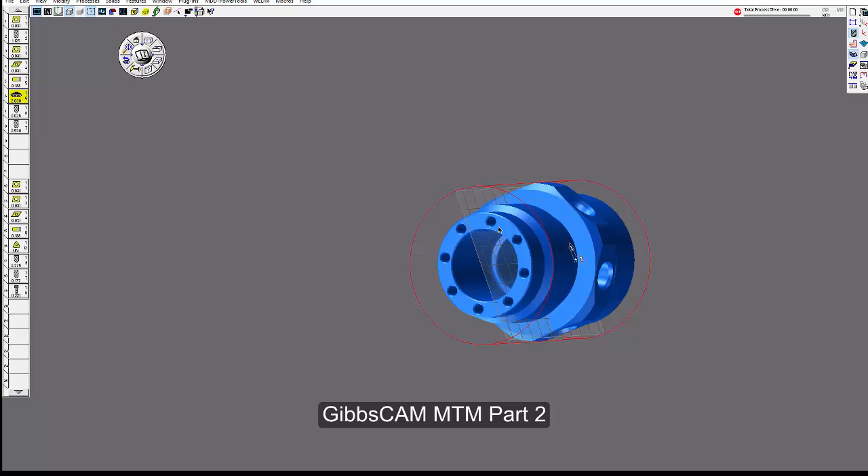This time we're going to give you a quick little review on how to do a complex MTM part using GibbsCAM. You can see I have my model already brought in. Has some ID work, end work, tapped holes, OD holes, some threading. I already brought my model in and oriented it correctly.

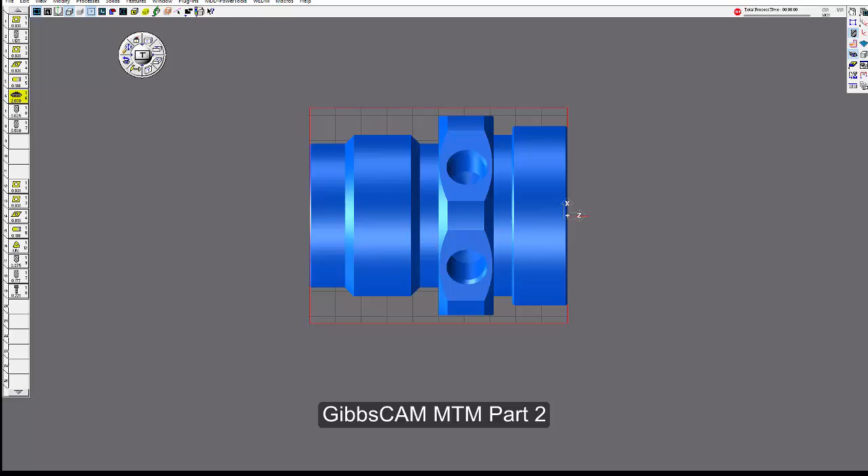Usually after you orient your part and get your origin where you'd like it, normally you go to view and do shrink wrap visible. This will wrap material around your outer boundaries. Now here you can open up your document page and you can change these values as you need to. This did a shrink wrap, did a 3-inch on the Z.

I'm going to add 1/8 of an inch, so there's some material coming out. I'm going to have it sticking out of the jaws 3 3/8, so my jaws are going to be over here, and my material is 3.5 inches long. It's actually going to be 3.625 because I'm going to add 1/8 of an inch on the back end as well. Over here, my clearance values.

Now remember, on MTM, the MTM product is for your specific machine. So when you get a MTM post processor from Gibbs, it'll have your specific machine here. Same with some of these others here, and all the details about your machine. It knows how many turret stations there are, clearances between spindles, etc.

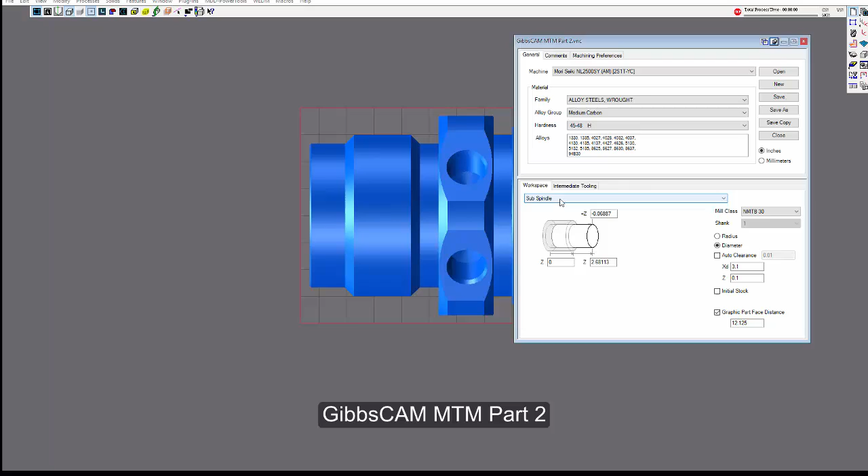So on here, my material is 3-inch. I'm going to wrap it to 3.1 and 1/4 inch away when my tools come back and forth from the machine. Now I'm not going to play with the sub spindle yet. We'll wait till we transfer that over. So I'm just going to concentrate on the main spindle here. And I'm going to say it has initial stock, so that means your stock is in the spindle already, preloaded.

And this graphic part face distance, I'm going to put 12 inches there. Now that's just the distance between the parts on Gibbs on your screen. Your machine is probably 24 to 40 inches, but that does not matter. This is just graphic part face distance, because you don't want to keep panning your GibbsCAM screen to look at the main and sub spindle.

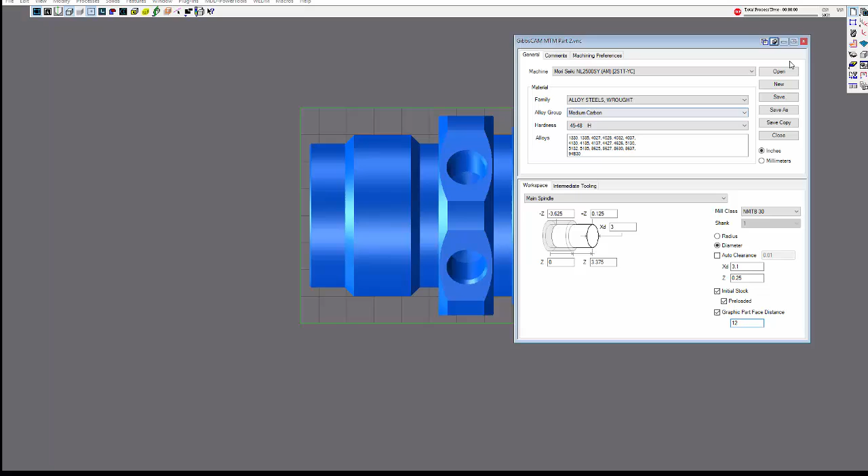So if I bring up my viewer and unzoom, you can see it shows main and sub spindle. I don't want to have to keep panning and zooming this up to work on it. So for right now, I'm going to click on this button and turn off the sub spindle. So now when I click on unzoom, all it does is zoom up the main spindle. And you can do the same thing when you get to the sub spindle.

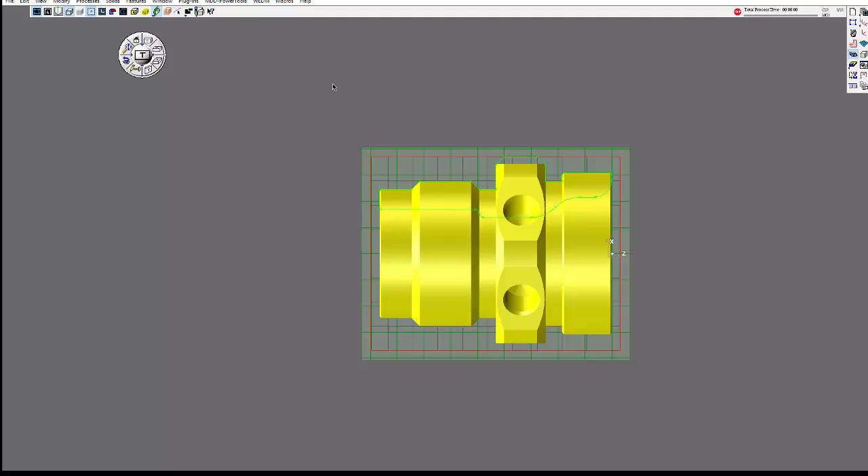So the next thing I want to do is I want to extract some geometry and create my tools. Now extract geometry on MTM or any turning, it's really easy. Click on your model. You can go up this button here and click on Slice Spun Body. What that's going to do is Gibbs is going to give you the geometry of the part as if it was spinning in a lathe. So I'm just going to extract the profile there and turn off the profile, and you can see I have all my geometry to do all the turning.

Now I have created 2 work groups. One I just called turning, one I called milling. You can make as many as you like to separate them in different layers, but I just have turning right here. Okay, next I want to create my tools. I've already created my tools here for this, and we'll just kind of go through this a little bit here.

Tool number 1 is going to be in station number 1. With MTM it does not matter where you put them in this list, because the turret location and offset are designated here in this page here. So it's going to be in position number 1. Now Gibbs knows, since it's MTM and it's a NL or NLX, it has 12 positions on here. I'm going to use offset number 1.

Okay, and I'm going to have it to be a tool holder. You give it your tip radius, your inscribed diameter, thickness, so on and so forth. So this is like a CNMG 80-degree diamond here. And I want the insert face down, so I'm going to uncheck this. You can see if I check this, it puts the insert face up, so that's going to be an M4 versus unchecking an M3 in most cases on most MTM machines.

Okay, next tool is going to be 1/8 inch, or sorry, 1 1/8 drill sitting in this direction. It's just going to be a static tool. Position 2, offset 2. Next tool, boring bar in station 3. 55-degree station 4, grooving tool station 5, a facing mill in position 6, and 7 will be an OD radial live tool, drill 5/8. Actually that's going to be a spot drill, and a 1/2 inch drill OD as well, radial live, and that's position number 7, tool length 7.

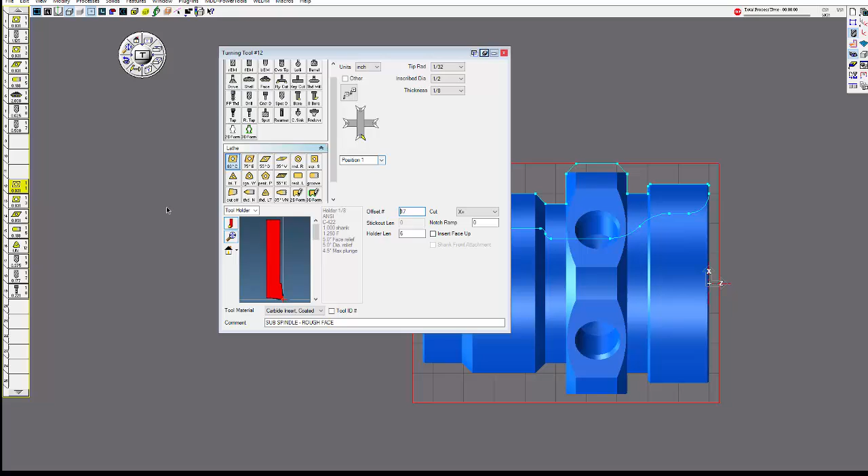Now on the NLs, the standard offset is any time you add a tool to the sub-spindle, it adds 16 to the offset, so that's why that's 17. You can see 3 will be 19. You can see the rest of these will be the same. Okay. So since the OD is a turning tool, position number 1, that's in turret position number 1. And your offsets, you can see so on and so forth.

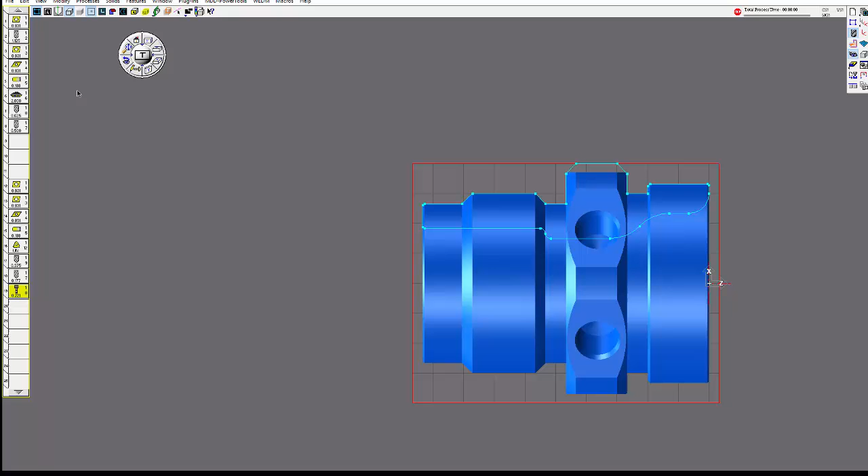The last one is going to be in position number 8. And this is the live tool holder that has milling on the front and back. It's an actual holder. So this is going to be also in position number 8, just like this one is. But you add 16 to it, that equals tool length offset of 24. So we have all our tools ready to go now.

Okay. I already have some processes done, so you're not watching this video for an hour. So I'm going to go through these on how I created them. First thing I want to do is face this off. Remember, I have an 1/8 of an inch material to face off. So I'm just going to open up this process, and we're going to do front face with tool number 1. I'm going to rapid it 1/4 inch away because I have an 1/8 of an inch material, and there's where the 1/8 of an inch comes in.

50 thou depth of cut, and I'm going to leave 3 thou for finish, and put in my constant surface feed, etc. I'm going to click on that face, drag it to the OD there. I want to cut to the bottom there, and I'm going to face it all the way down to X0. Okay, that is done.

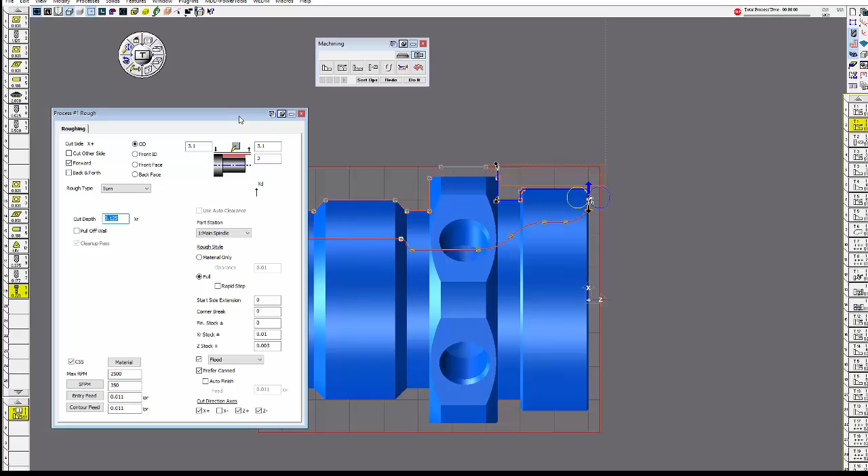The next operation I want to do, same tool, I'm going to rough out the OD here. So here it brings up this process, OD, tool number 1, 3.1 to rapid it to and rapid it out. My material is 3 inches. Depth of cut 1/8 inch, constant surface speed, my feed rates. It'll leave a little bit of stock on the OD, a little bit on the Z. And this time I'm just going to click on this, start of my part. If I want to start a certain distance, I can say start 1/4 inch away, and it'll put it 1/4 inch away. That's up to you.

I'm going to hold the Control Shift down. It'll snap to this line. I want to go just a little bit past there, and I'll just click on redo in this case. Okay, so we have the face and OD done. Next thing I want to do is drill. So that's going to be with tool number 2. And I'm going to just feed in, rapid out, rapid it 1/4 inch away, and when I'm done, 1/4 inch before it goes home, it does a tool change.

And this button here, let me just zero that out. I'll highlight it again to show you. You just need to hold down the Alt key in Gibbs, and you click on the end of your part, and you can see that puts in 3.5. Well, my material is actually 3 5/8 down to here, so I want to make sure the full diameter is through there a little bit. So I'm going to go -3.7. That should get plenty past that. Okay, put in your RPM and feed rate, or you can just click on those buttons and it'll fill in the suggested feeds and speeds for you.

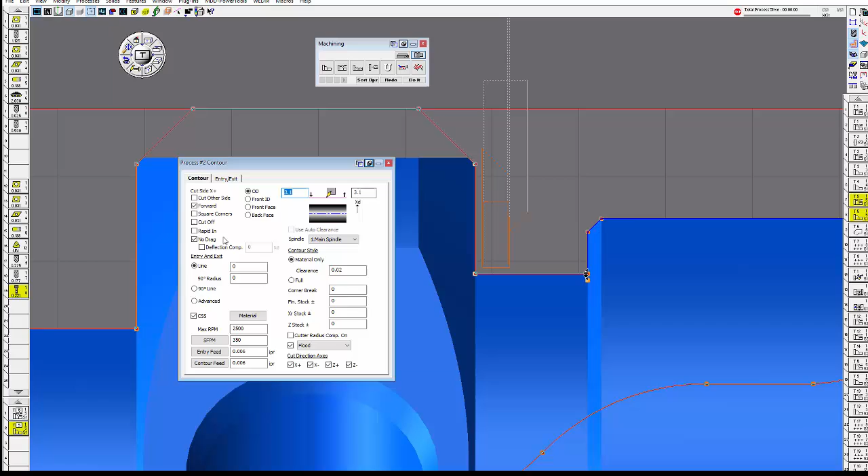Now I don't want the tool to come down here and then drag up here. So if you check this, that means it'll push the tool down to here, push the tool down to there. So I'm going to highlight this, start off my part a little bit, and here a little bit off my part. We'll click on redo, and there I have my tool path there.

Now anytime in Gibbs you can render what you've done so far and see how it's done. You don't have to wait till you're all done to see how you're coming along. So let's do that. Okay, click on my cut part render. We'll slow it down just a little bit. We'll do a quarter cutaway here. That's half, there's full, there's quarter cutaway.

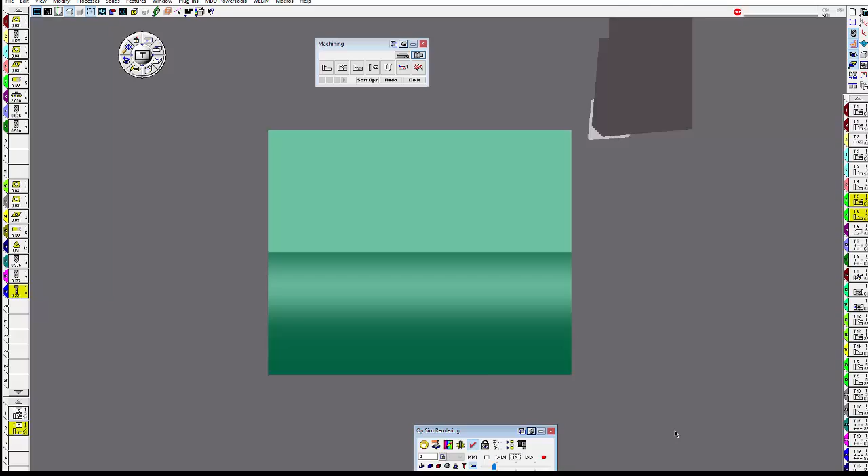And we can see the first thing we're doing is going to face it off. Take that tool, rough the OD, drill, rough the ID, speed it up a little bit, and finish pass with that same tool.

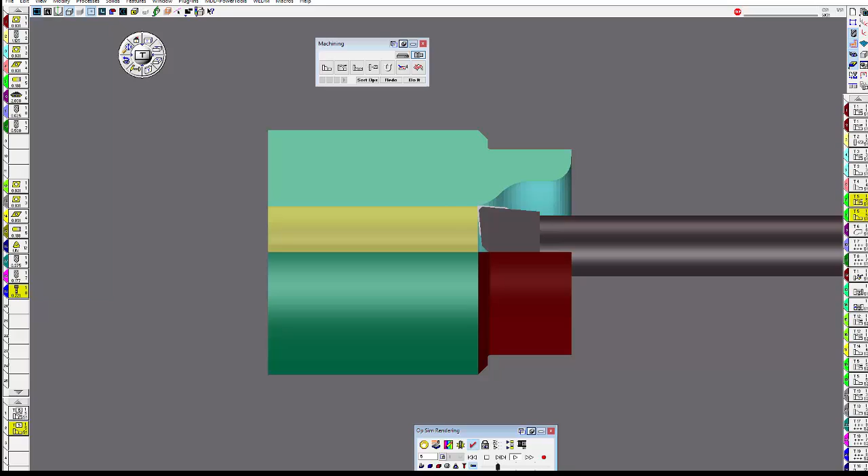Finish pass with the OD, and groove, and finish. So far, this is where we've gotten. Okay, let's go back to our programming now. So operation number 9, tool number 6, is going to be facing these flats off here. And I'll show you a cool way to do that.

I'm going to turn off my cam palette, and I'm going to choose the YZ plane because that's the plane we'll be on. Click the home view, and you can see your part there. I'm going to bring up geometry because I'm going to actually draw some geometry to cut this. So first make sure you select the tool that you want to use, in this case the 2-inch face mill. I'm going to click on line and mouse line, and you can see as I move my mouse off, there is my cutter. So it's really handy.

So I'm going to get my cutter close to there, and I'm going to be looking at these numbers here, and I want to start out at Y0, no need to have it offset there. So when that's Y0, I'm going to click my mouse once, and I'm going to drag it just like it's cutting. And I just want to barely go past this radius here so I get the nice flat. So when I pass there just a little bit, I'm going to click again. You see my tool path, press escape to get out of there.

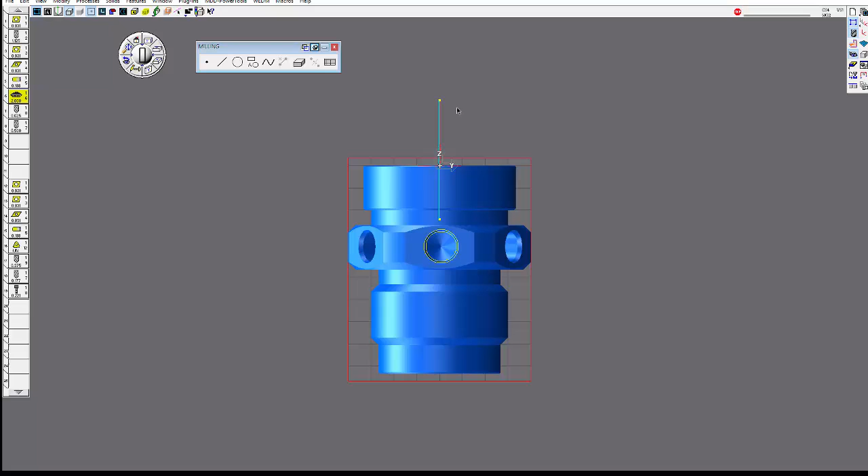Now you see how you have the line to do the milling. Now if you want to move that up to that surface, that's fine. You really don't have to. But if I wanted to move it up to that surface, I could, and you can see now it's there. Okay, so now I want to program the facing. So that's tool number 6.

So make sure before you add any values or do the toolpath, you click the rotate tab, make sure you're on the correct plane, which is the YZ plane on the main spindle. I'm going to do position milling, which means it's going to rotate every 60 degrees to do the 6 sides on there. And I'm going to duplicate it 5 times every 60 degrees.

So here we know our material is 3 inches because that's what we start out with stock. Let me just zero this out here. And I'm going to have the Alt key pressed when I click on this flat, and you can see it puts 1.38909 in there just fine. Choose your RPM and feed rates, whether you want to leave any stock or not, and where you want to rapid it away from. And so everything looks pretty good there.

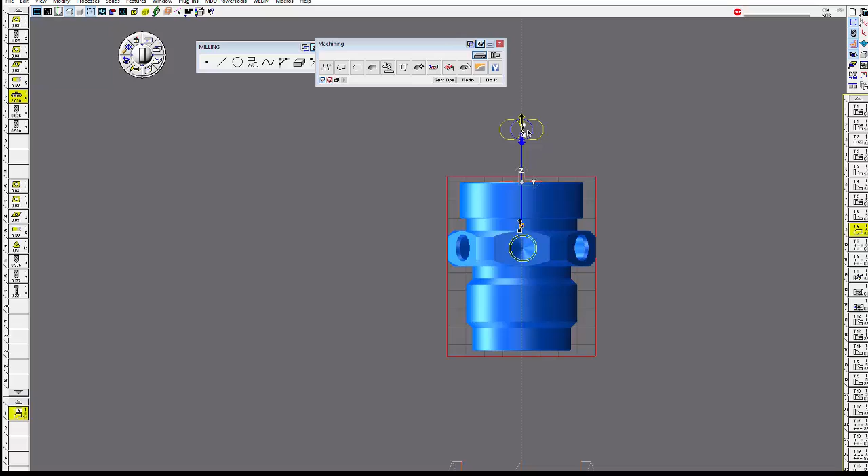Now this time you don't want to choose the outsides, you want to choose right in the center because that's where you drew the geometry. And I'm just going to click on redo, and you can see there's our toolpath so far. And if we want to render, we can do that. Let's just turn on our simulation, and we'll speed it up a little bit just to get to where we left off.

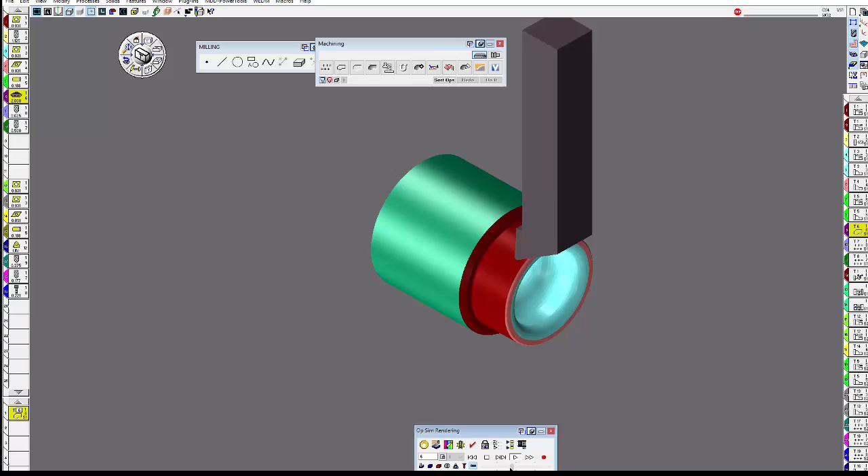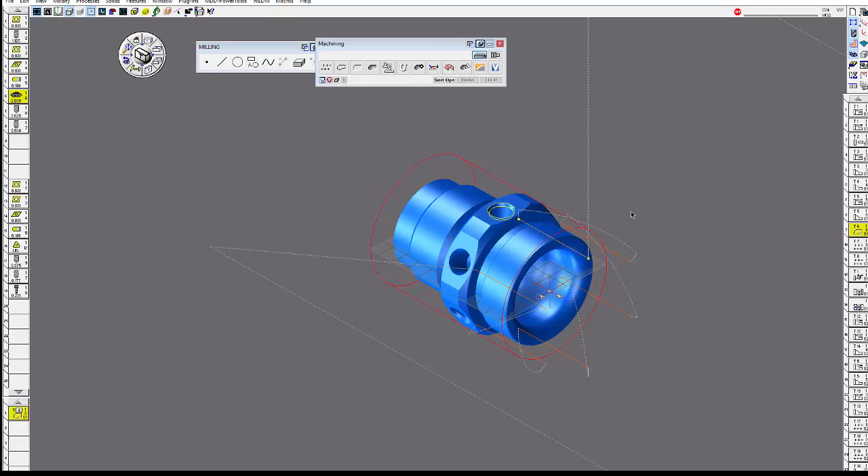So we did the groove. So the next thing now, operation number 9, is facing the part off. Okay, so we face it off. The next operation is going to be drilling. Okay, we need to pull geometry off the part for drilling. I'm just going to delete these 2 just to show you how I pulled them off.

So bring our part up, make sure you're in the YZ plane, which we are because the tool is going to come from the outside to drill and chamfer this hole. And I'm going to turn on edge selection. I'm just going to select this edge, hold control, this edge, right click, extract the geometry, which is just great. And there we have our geometry there. Okay, so I'm going to bring up my tool number 7 and tool number 8, multiple process here.

Okay, I'm going to make sure I'm on the YZ plane first, and again this needs to be 6 times around, so I'm already doing the 1 hole, so 5 more times every 60 degrees will work just fine. Okay, I'm just going to zero that out, I want to know where this flat plane is, so I'm just going to hold down the Alt key, click on that, and you can see it's 1.38909 is where that is.

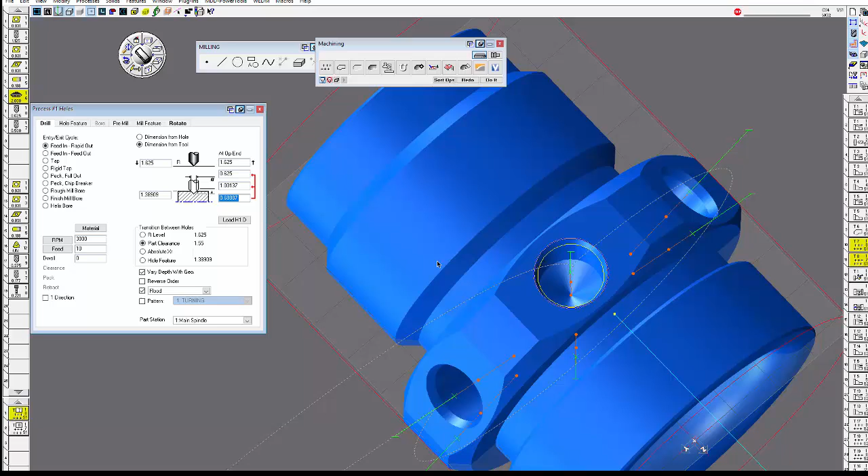And to get the depth of the hole, if you like, you can click on this here, because this will be the point of the drill. You can click right down the bottom of that point, and it's going to put 0.6887. That is from X0 there, and that should get you your, let's just make sure I'm right there on the point. Okay, should be good. And everything's good there.

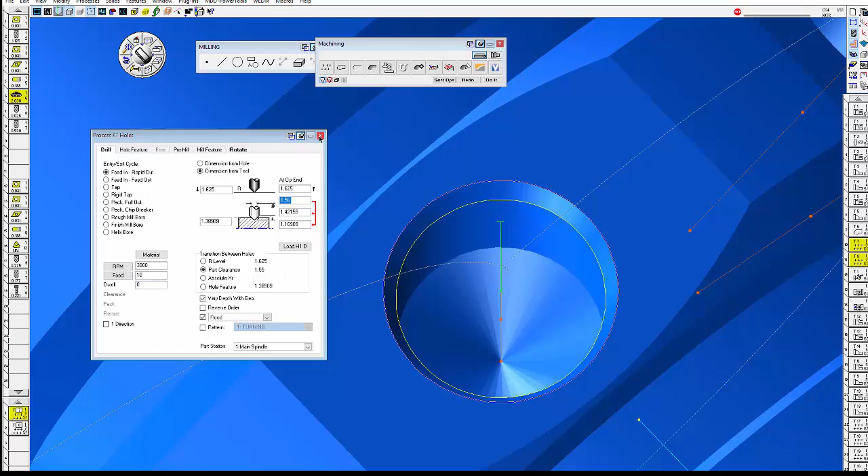And my second process is going to be with tool number 8, which is actually our drill. Actually, I want the drill to be down there. Sorry, and not my chamfer. My chamfer is tool number 7. So I want to make sure I get that diameter right. So actually, instead of going with the depth, I'm going to say cut this diameter. So I'm just going to Alt-click this on the diameter. It'll fill in the blank and fill in the depth for me automatically. Okay. Select my hole, click on do it or redo, depending on what you're doing. And then we're up to the next step here.

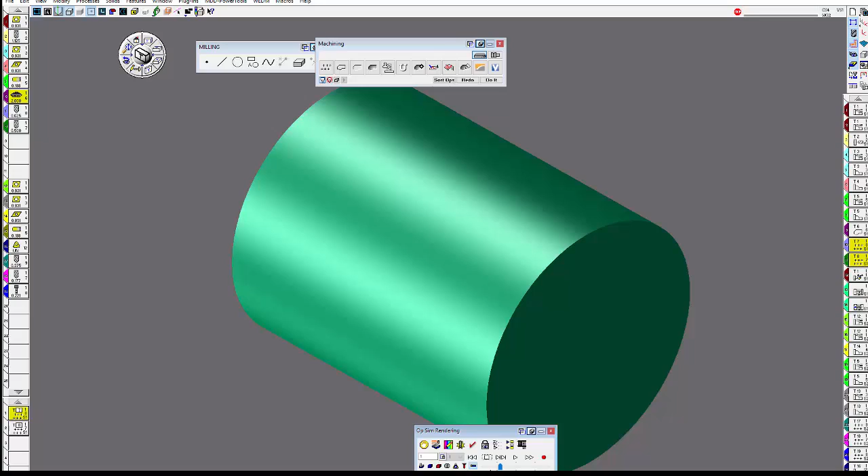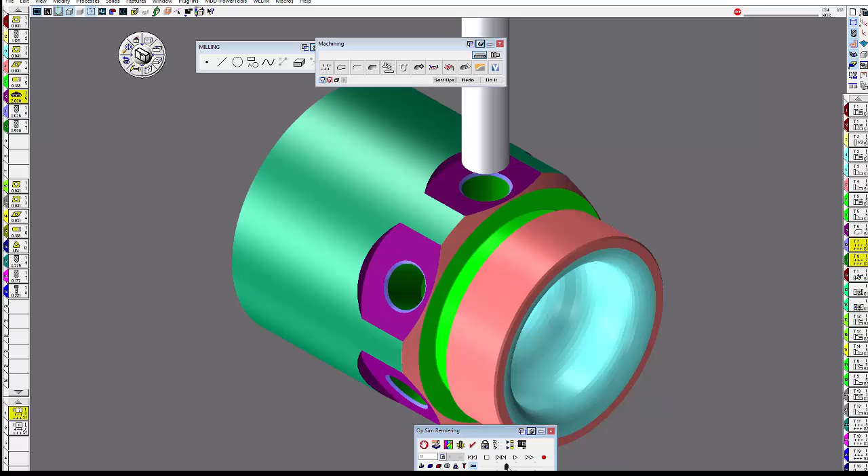We're all done with the main spindle now, so let's go ahead and render that. So turn on our rendering. Let's unzoom it a little bit and rewind. Okay, let's click play. Drill, rough. Speed it up just a little bit. Spot drill, drill. And we're where we need to be to transfer to the SubSpindle now.

Okay, transferring to the SubSpindle, in every MTM product, you'll have this utility tile here. So I'm going to bring up the utility. So what I want to do first is I want to get the turret out of the way of the part before the SubSpindle comes up and grabs it. So I'm going to bring up a utility tile with the tool I want to use in that position before it moves, in this case station number 1. So you bring up a utility tile with station number 1.

I'm going to do what they call a move tool group. You can see there's a lot of choices there. I just want to move the tool. So move the tool out of the way from the main spindle. I want a new location. So the X, I want it to go home, so it's going to be way up in the machine home there. And the Z, I want to bring it right to Z0. And I want to do it with the part, ZX, not the spindle, but the part, and actually the tooltip there. So I'm going to bring the turret right over to Z0, so that's good clearance for the SubSpindle to come up and grab it.

So the next utility I'm going to bring up now is going to bring SubSpindle in. Okay, that's in this list here, SubSpindle in. The part is in the main spindle. There's no part in the sub. I'm going to do it with the spindle on, so the air blow will come on and blow my jaws off to get all the chips off. Forward, you put in any RPM you'd like, and I'm going to sync the C spindle so that all the holes and all the milling I do from the end and here, everything's timed together when it goes to the SubSpindle.

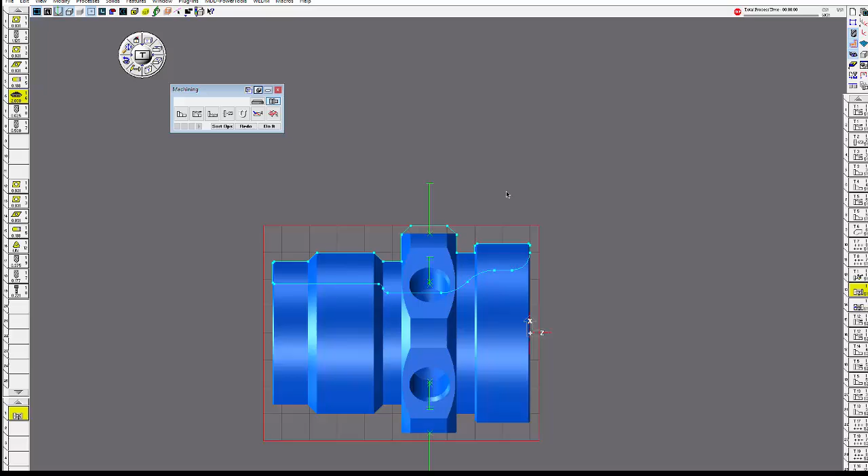I'm going to make sure I'm back on the XZ plane. I'm going to highlight this button, hold the Alt key down, click here, and I want to grab it on minus an inch there. So between here and here is an inch, so I want to grab it onto an inch. I'm not doing any shift angle there or anything like that, so I'm going to click on redo. So now my turret has gone over, the SubSpindle has now come up and grabbed this.

Now the next thing I want to do is I want the SubSpindle to return. Again, feed rate 200 is just fine, spindle on, same thing, 500 RPM with the part, and I want to open the main collet. If you don't click on the main collet, the SubSpindle will try and grab the part and pull it out of the main spindle and not be successful, because usually the main spindle is larger. So make sure you have this on, and actually we'll just leave that main loaded there. So we'll redo that.

Okay, now on my operation list, I'm working on the SubSpindle now. Okay, that says T12 down here, T12, but it's actually station number 1. Okay, but before we do that, we need to turn on our SubSpindle.

We'll unzoom it, and I want to move the geometry for the turning as well as my solid model over to here. Okay, so I'm going to turn off my cam for just a moment. I'm going to stay in the ZX plane here. I'm going to highlight the geometry, hold the control key down, and highlight my solid model. I'm going to go to modify, duplicate, and translate.

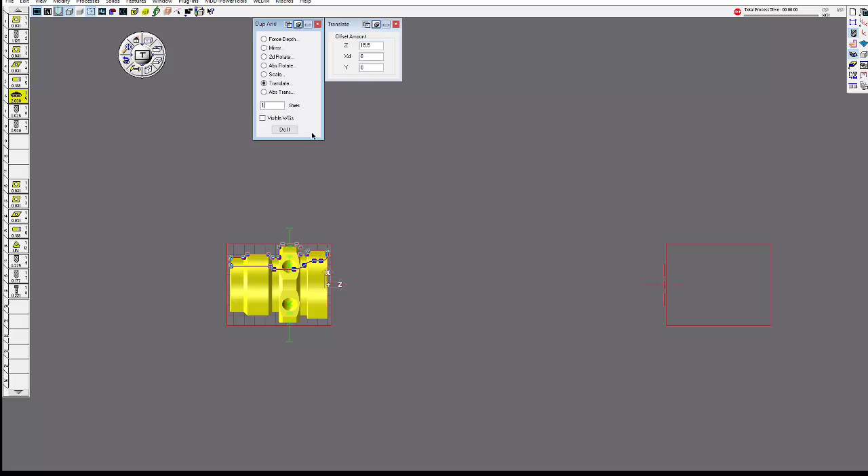Now remember, our part is 12 inches between here and here on the graphics, and our part's about 3.5 inches. So I'm going to put 12 plus 3.5. Now you can get it exact if you want to add the 1/8 of an inch here and here, but I'll just show you how to adjust it after just by doing that amount there. So you just want to do it one time in the Z, so click on do it, and you can see we're pretty close there.

We're not quite on the money. Okay, like I say, you can calculate exactly if you want, but I'm going to show you how to move that to where you need it to be. Now one thing you got to remember with solids, when you duplicate and translate a solid or move it or rotate it, they still are one, so you need to separate them. So you open up your 3D palette and you click on the scissors, which will make them 2 individual pieces. So now as I move this one, it's not going to move this one.

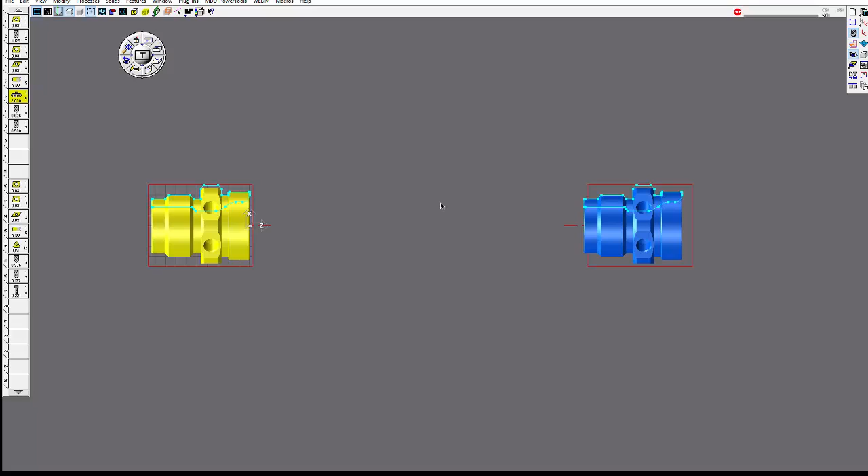Okay, so for right now, I'm done with the main spindle, so I'm just going to turn it off. I just go to SubSpindle, turn off the eye on the main spindle. Now when I click on no zoom, it's just going to zoom up the SubSpindle now. I'm going to go to the coordinate system that says ZX plane SubSpindle. And I'm actually going to tell it that this geometry and the solid is in the SubSpindle, it's related to the SubSpindle.

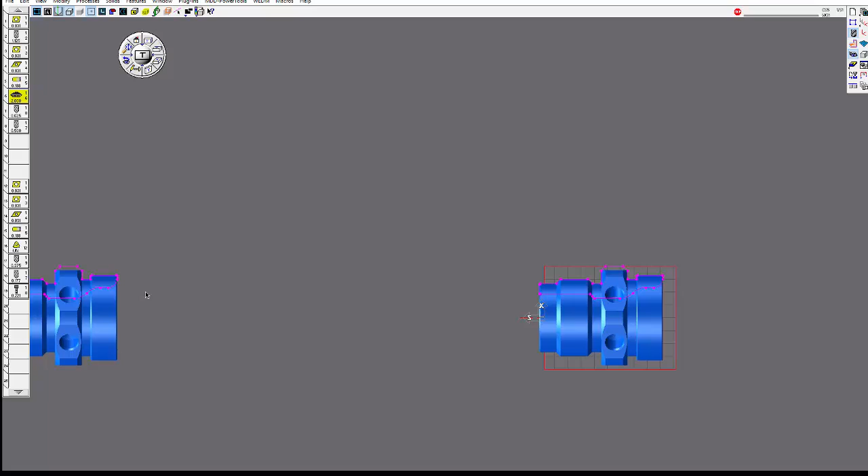Remember, we just duplicated and translated it from the main, so that's why everything thinks it was drawn in the main spindle. So that's just easy to do. Just highlight the solid, your geometry, and just right click and click change that coordinate system to the SubSpindle. Now you can differentiate between the main and the sub.

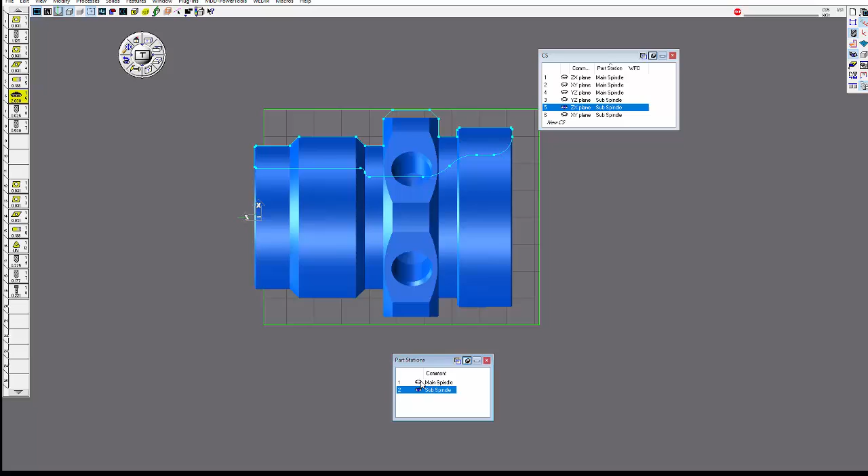Let me just turn on the sub momentarily. You can see the purple geometry. That means it's in a different coordinate system. If I right click and say move to that coordinate system, you can see that's the ZX plane main spindle. If I right click on here, that's the ZX plane SubSpindle. Okay, so we'll turn off main, unzoom. Okay, now we have everything in our SubSpindle.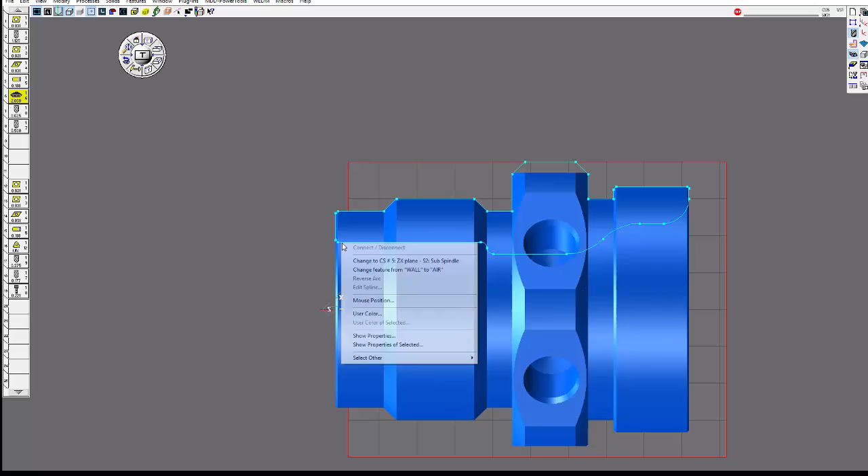We just need to adjust where the Z0 is on the front of our part. So I'm just going to bring up our mouse position here, and I'm going to click on it there. Bring my mouse over here; it'll be a little easier to see. See if I click on here, you can see that's 0.05613 from Z0. Okay, so we need to actually move it back that same amount. Okay, so let me just click on that again. Let's just actually dimension that. That'll make it a little bit easier.

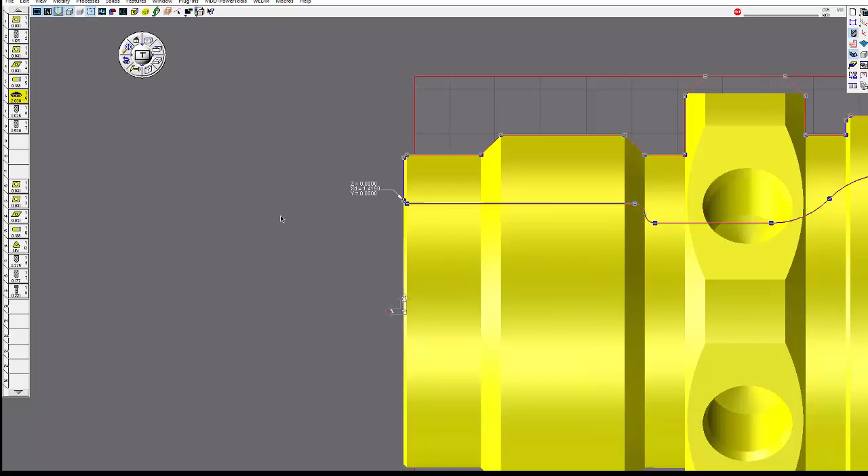Okay, we're 0.0561 away. I'm going to highlight the solid, highlight the geometry. I'm just going to translate it in Z. I'm going to go negative 0.0561 in Z. And now you can see we're right at Z0 there. Okay, let's turn this off here. We'll turn off the dimensions and we'll unzoom. So we have the SubSpindle now correct as far as the Z0 goes.

Now we have to add a little bit of stock to the SubSpindle. So let's turn on our document page again. This time instead of the main spindle, we're going to go to SubSpindle. Okay, so these change a little bit now. Our clearance plane is going to be 3.1, and remember we're going to have an 1/8 of an inch material from the transfer, so I'm going to again say that's 0.125 stock. It's not initial stock, we're grabbing it from the sub, so you don't check this graphic part.

Face distance still 12. Remember we have an 1/8 of an inch in front of there. And if we do a little math here, when we do the graphics, this will help. So our overall part length is 3.5 inches. Remember we left an 1/8 of an inch on the front and back, so that's 1/4 inch. So actually we have 3 3/4 overall length of material.

Remember when we did the SubSpindle coming forward, we grabbed it on an inch. So if I subtract an inch, that makes it 2 3/4 out there. And we have the 1/8 of an inch sticking out, of course, on there. We're going to leave this right here for now, and we'll show you how we can adjust that later down the road.

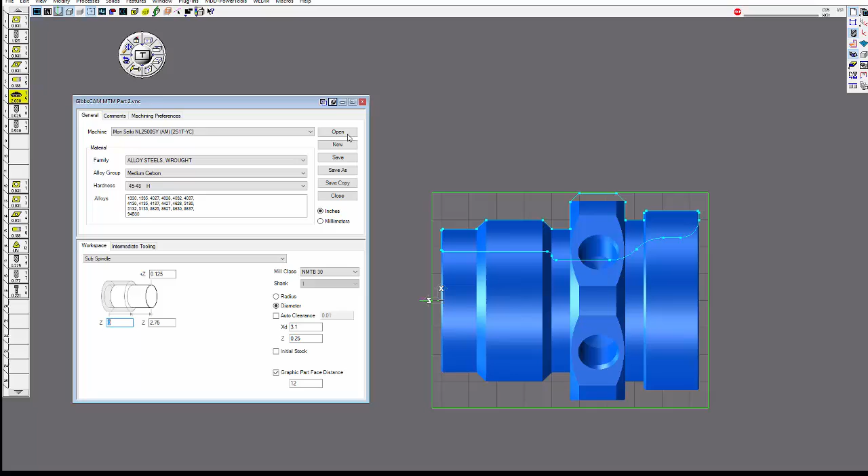Okay, so operation number 12 is going to be facing off. This time make sure you select SubSpindle, not main, but we're on the SubSpindle now. Front face, make sure you have the correct tool in there. Okay, pretty much the same thing as before, but now we're on the SubSpindle. I'm going to take a little bit less depth of cut, just because we're holding onto the sub.

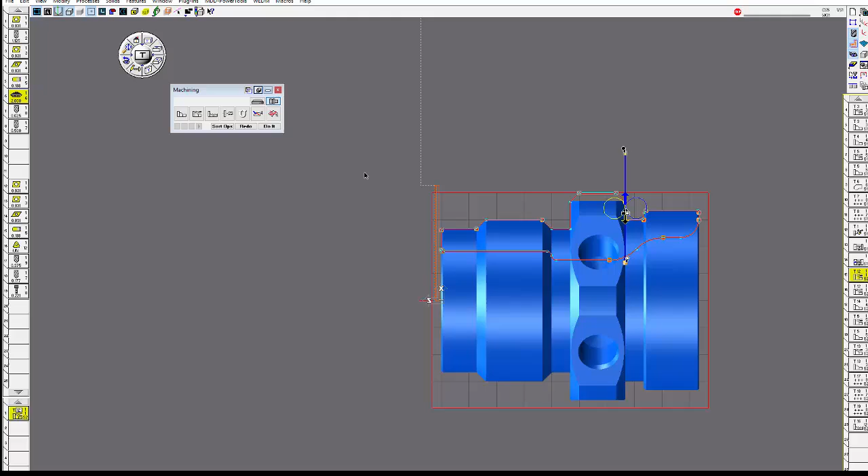And again, I'm going to highlight that up to there. We're going to cut down, and since we have the hole drilled through, I'm just going to go a little bit below that. Okay, should be good, and we're going to just redo that. Okay, so now I have faced off. Next operation is going to be to rough all this material out with the same tool.

Okay, again, OD, material's 3 inch, 1/8 of an inch cut, depth and everything almost like our main spindle there. I'm going to start out there, a little bit off our part, and I'm going to probably just end right about there. Okay, make sure you go in the right direction, and we'll just redo that. Okay, again, make sure you have that unchecked, otherwise the tool will dive in there and you won't get a canned cycle.

Okay, next tool, 14, is going to be our finish tool. Again, OD there, 3.1, 50 thou on there. Start there and bring it down just about right there. We'll let it snap over to there in that direction. Again, on this edge, out, redo that. Now you can see our finish tool paths up and out.

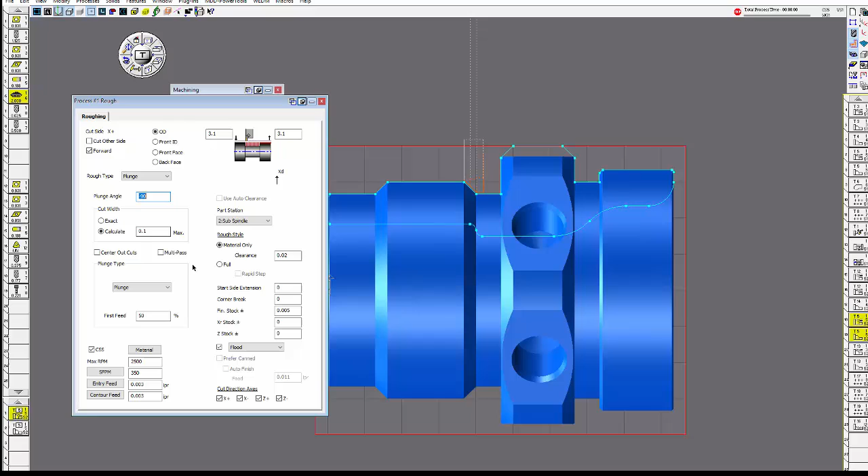Okay, next thing I want to do, groove. Basically almost the same tool, but in the SubSpindle now. Again, 3.1, OD, -90, almost the exact same thing we have on the main spindle there. Okay, I'm going to highlight that and up to there. Make sure you choose the right direction and redo, and now we have our groove finished.

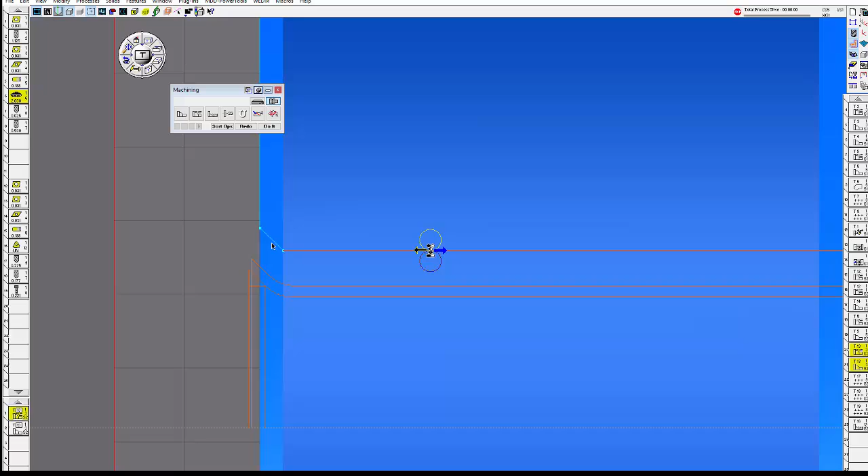Okay, next operation, rough out the ID. And actually we're going to start on this little chamfer out here a little bit so we get the chamfer on the finish cut. I'm going to end right there, and we're going to rough and we're going to finish there. Okay, we'll do a little bit of a line there. Okay, we're going to redo that. So now we have our rough and finish there.

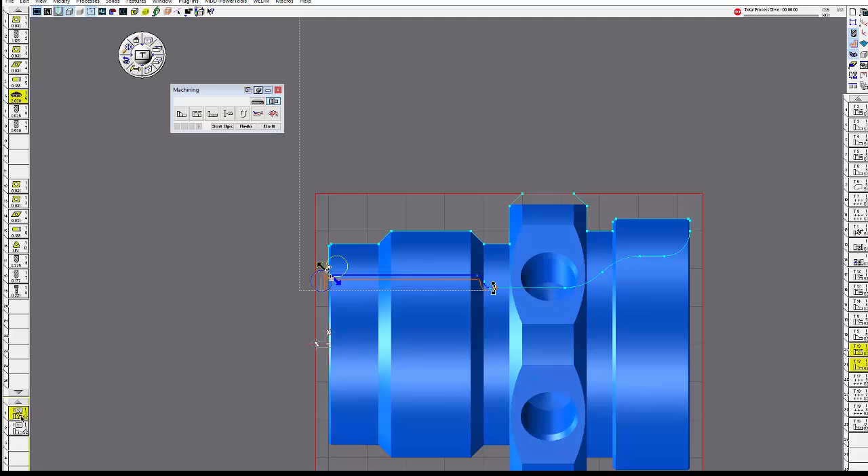And next, let me change this a little bit. We're not going to use material only. We're actually going to do full. And we have 1/8 of an inch there, so everything is pretty good there. So we were good in the first place.

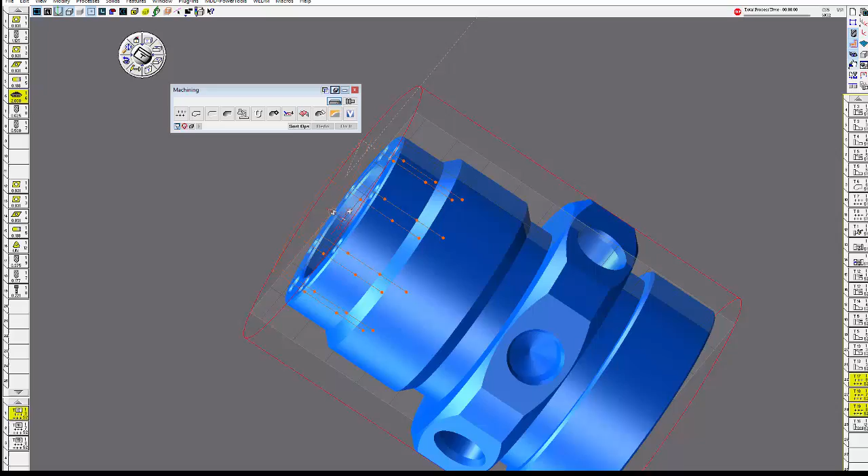Okay, next I want to drill the holes in the end, but before we do, I need to pull off some geometry on there. So I'm going to rotate this around. I'm going to turn off our CAM palette for a moment so I can pull the geometry off there. Just click on this, turn on face selection, click on this face, right click, and go down to extract edges. And there's all my geometry I need for that hole. You should be on the XY plane though in the SubSpindle. Okay, now I have all the geometry I need to cut those.

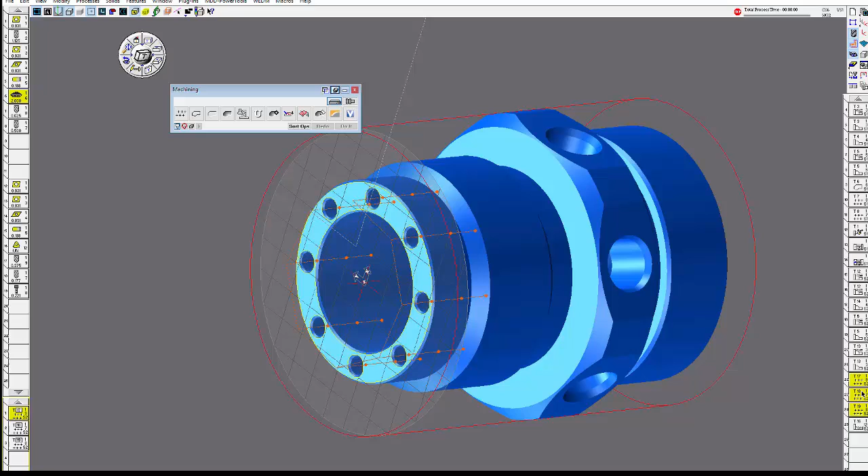Okay, so my next operations, I'm going to do 3 processes here. Tool number 17 is going to be the spot drill, drill, and then tap. So make sure when you're setting up these processes, the first thing you always do is make sure you're on the correct plane. Otherwise, these numbers will not be correct here. So I'm going to do a 1/4 inch chamfer on here. That'll get this little chamfer on the end there. Fill out your RPM and feed rate. The next process is going to be tool number 18, which is your 177 drill, and then your tap.

So in this case here, I'm going to do position milling. So this is small enough to where I can hold the part with the brake and go around to each hole using XY coordinates. If I did polar and cylindrical, it would do the one hole, then rotate C, next hole, but I have enough room here to do that, and it's usually a little bit faster sometimes.

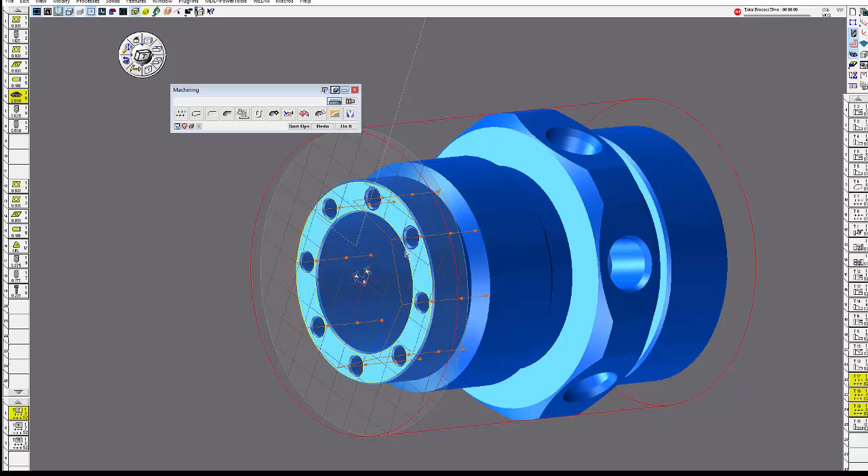So I'll click on the hole. I just need to click on each of the holes there, since I'm doing XY location, and we'll just redo that. Okay, now we have just about everything done. I'm going to show you, well, one last thing, threading, sorry.

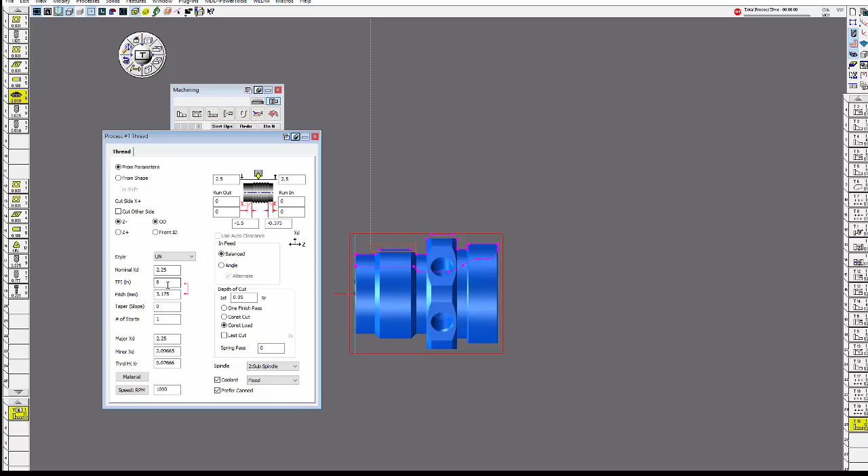Again, make sure you're on SubSpindle, and I'm doing 2 1/4 by 8 threads per inch with my tool, and we'll just redo that. Okay, now we're done except for the part unloading, and we'll show you that last of all. So I'm going to save it. We're going to bring back the main spindle so we can see both the main spindle and the SubSpindle cutting.

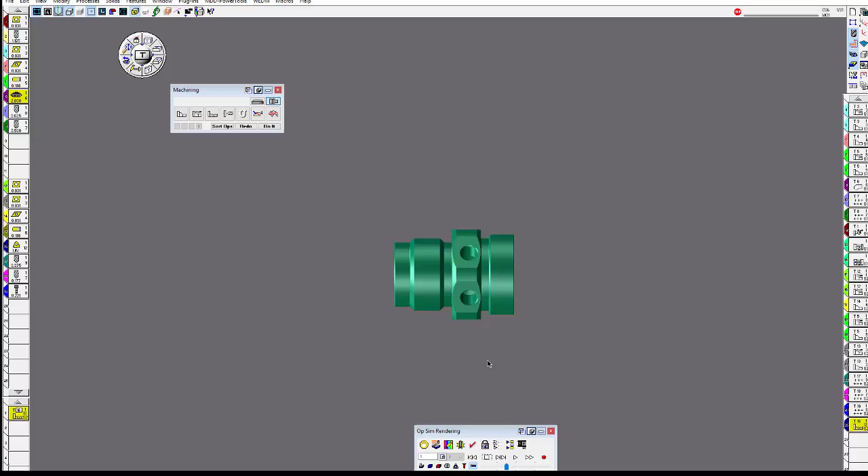Okay, let's bring back our rendering. Okay, we'll rewind it. We're going to show both the main and the sub. So let's turn on the main and the sub, unzoom it. Okay, we'll slow this down a bit so you can see everything here. Okay. And right now I show material in the SubSpindle, which is okay for now. We'll show you how to fix that. Okay, so I'm roughing the OD.

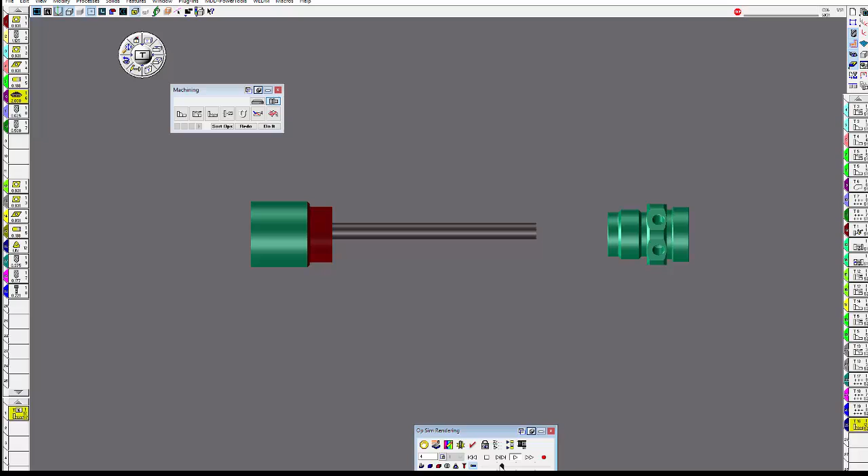Before we get too far, I'm going to click on this button that says stop before the unload. Okay, that way you can see it transfer a little bit better. Okay, so now everything is ready for the SubSpindle to come forward. I'm just going to single step through this. So the SubSpindle comes forward, grabs it, brings it back to the back spindle, and you can see everything back here is what we did on the main spindle.

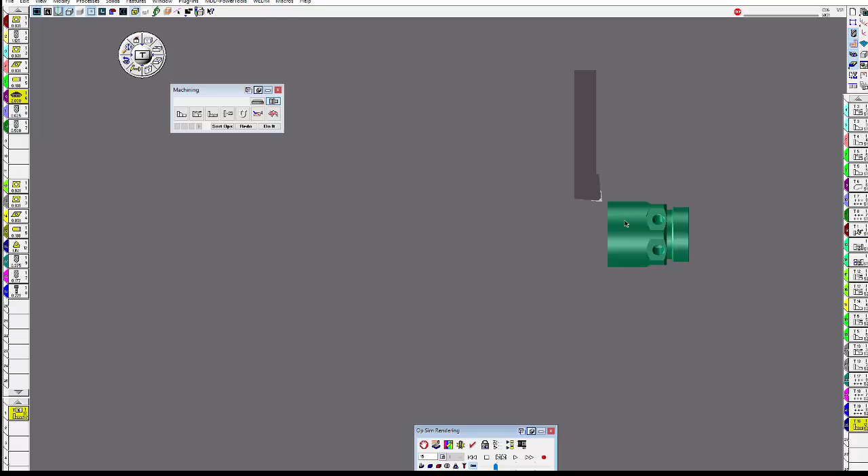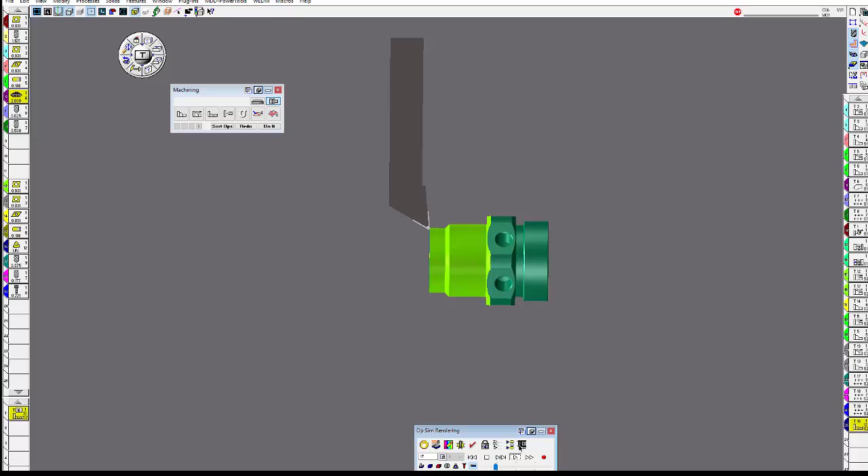So you can see Gibbs remembers what was cut on the front side and transfers it to the back side. So you can see that right there. Okay, let's continue with the rendering. Okay, facing that off, OD cutting. Finish. Now you're going to see it a little bit off here. Remember we talked about moving the geometry to make the rendering look better. We'll turn on the quarter cutaway there. Half cutaway would be a little better.

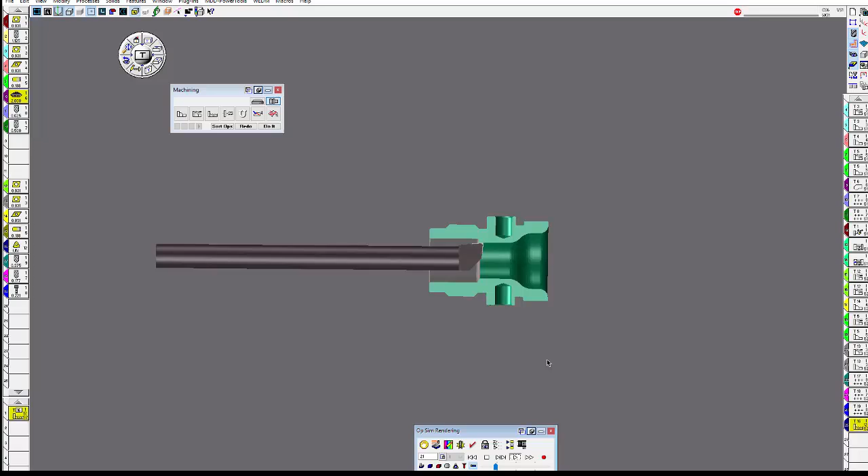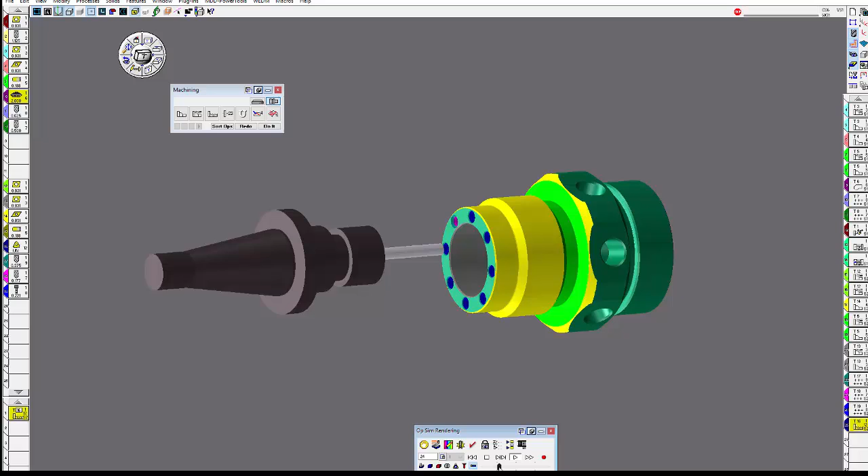Okay, then we're doing the grooving there and the drilling. So spot drill, drill, tap. There's our tap. And then threading at the end. Now, of course, threading, you want to make sure if you're on the SubSpindle, you have the insert facing up. Otherwise, you'll have left-hand threads and not right-hand threads.

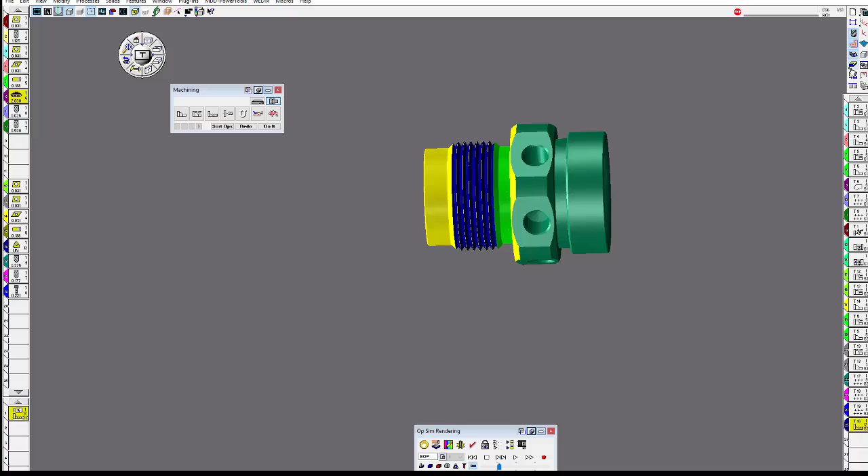So now our part is finished. Okay, looks pretty good there. Let's unzoom that a little bit. Now, one thing that's nice when you're using MTM or anything is to turn on the geometry. So let's go ahead and do that now. So by clicking this button down here, it turns on the geometry. So that way you can check your rendering along with your part.

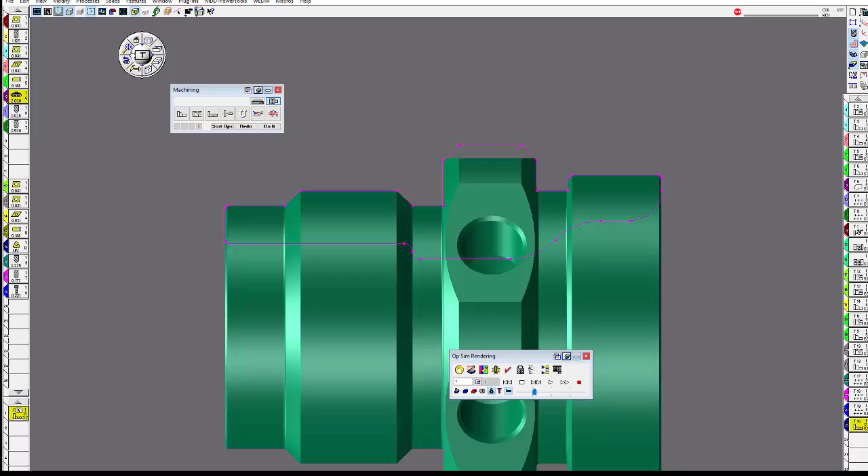And everything looks pretty good there. So we'll render it again. Transfer to the sub. And everything looks good there. Okay, we'll turn off the geometry there. So the last thing we need to do is unload the spindle, because if you don't unload the spindle, it's going to leave the part in the SubSpindle, and then when it transfers and goes to the main spindle, it's going to push this part into your main spindle.

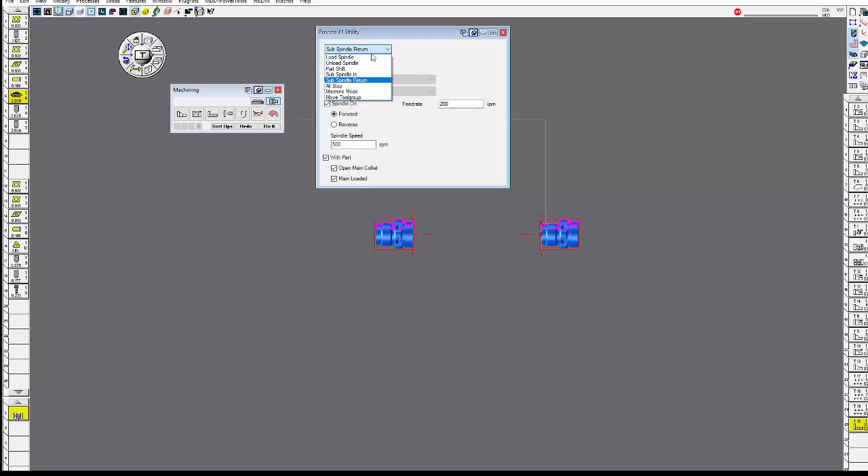So the last utility we need to do, I'm going to bring one last utility up, just drag a utility down there, and this time we're going to do unload spindle. And you can either do it by manual chuck or parts catcher. This will just use the parts catcher. And it's going to be a SubSpindle.

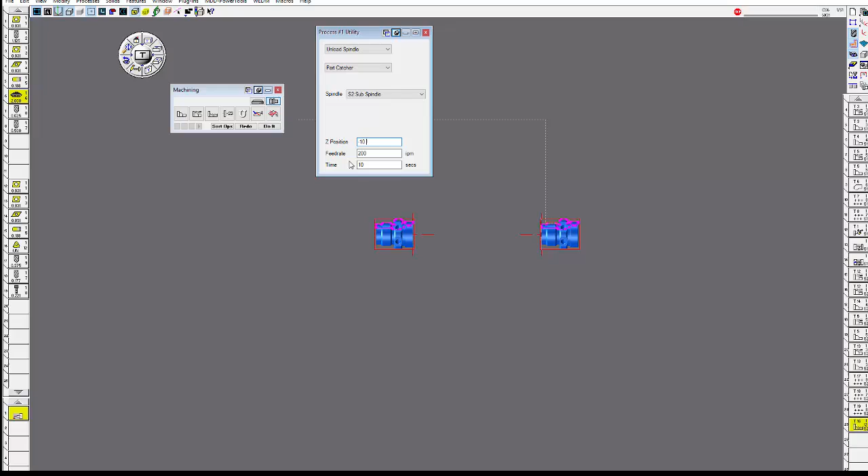And the Z position, I want to bring the Z a little bit closer to the parts catcher before it dumps it into there. So I'm going to say minus 10 inches is usually pretty good. Feed rate, we're going to start out with 200 and approximately 10 seconds it takes to unload that. And we just click on do it.

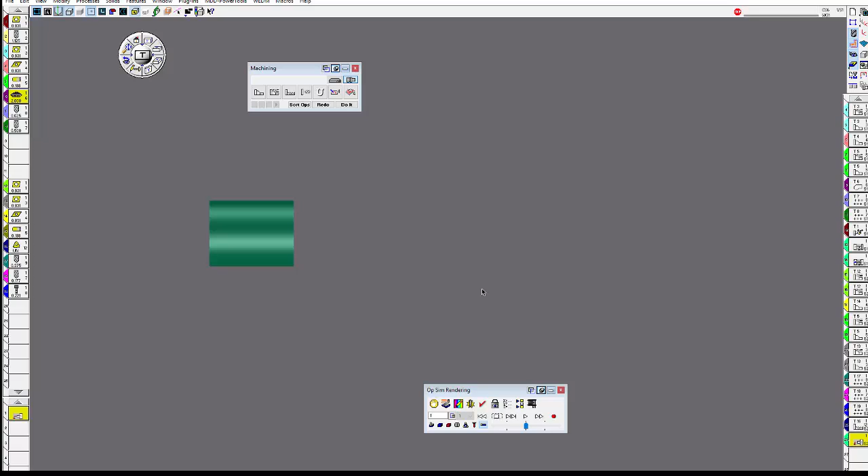So now, if I unzoom everything, and we turn on our cut part render and rewind, you're going to see there's nothing in the SubSpindle now. So when we render, we transfer over main to SubSpindle. And that's a quick little demonstration, not very quick, but demonstration on MTM, how quick and easy and fast it is to do in GibbsCAM.